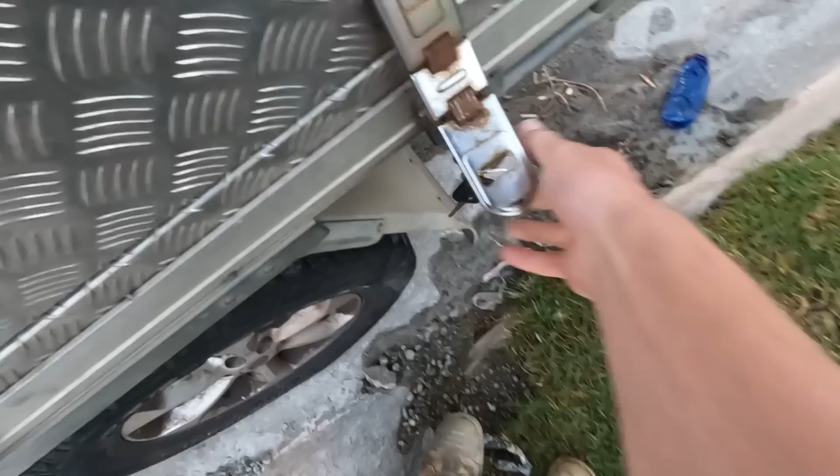Alright, so the slab's been flicked out. I wasn't here to film any of that process, but from here on out I will be filming everything we do on site. Now, since it is flicked out, we can jump straight onto the cut-in.

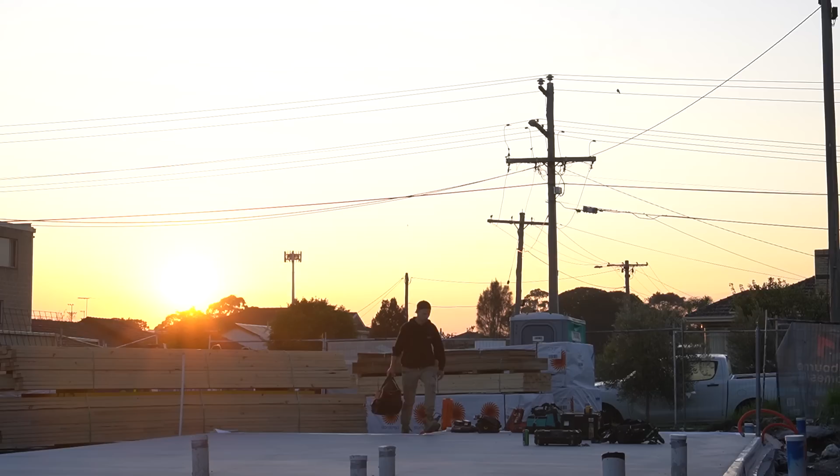I'm just going to go through and cut in the top and bottom plates and lay them out on all these flicked out walls where they have to go.

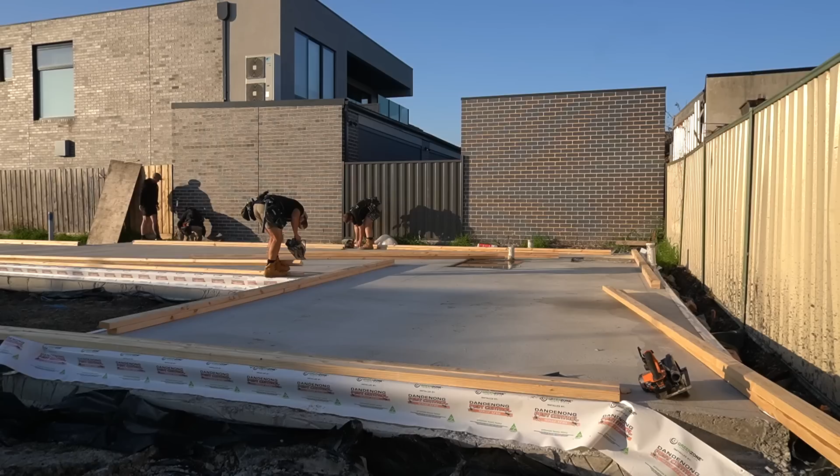So we have a couple guys doing this, and while this is being done, we've got a couple of the boys doing the pre-cut, cutting all the studs to size. We've actually got two different stud measurements for downstairs - the majority of the house is going to be 3 meters with 3 meter ceilings, and this back section where I'm working right now is actually going to step down and have a 2.7 meter ceiling.

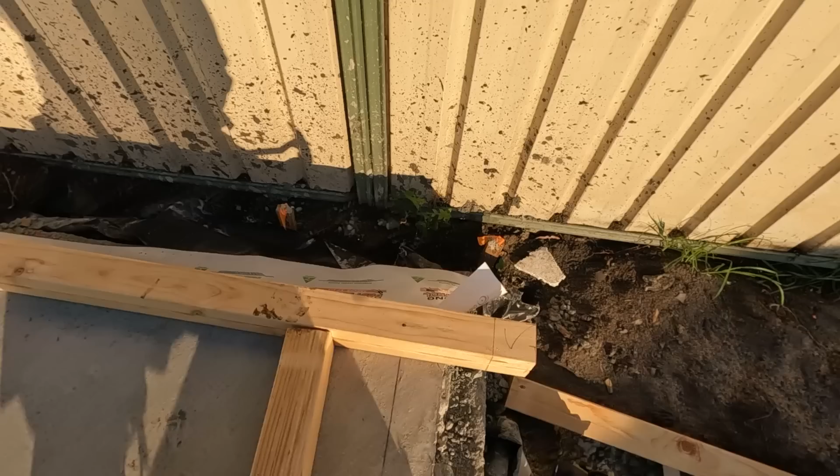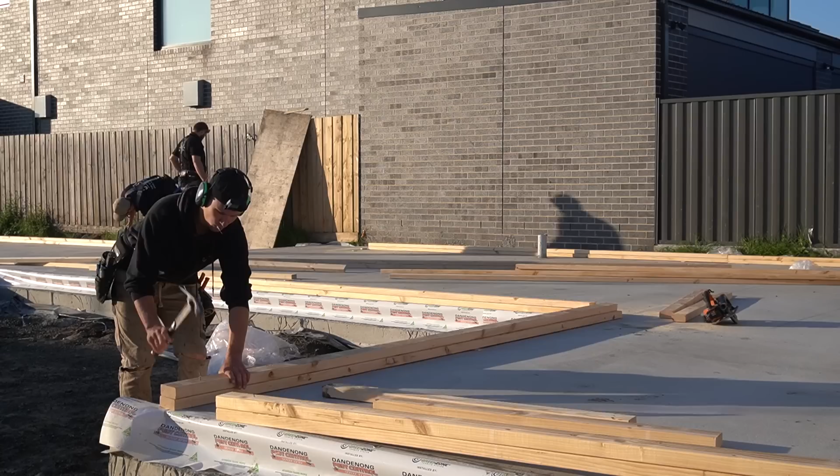So what we're going to do is go through and cut in all of our plates, and once all of our plates are cut in, then we'll go through and start marking out for the studs - windows, doors, niches, whatever we need. The only thing I'm marking right now is our junction marks to make sure that all of our plates are laid down in the right place.

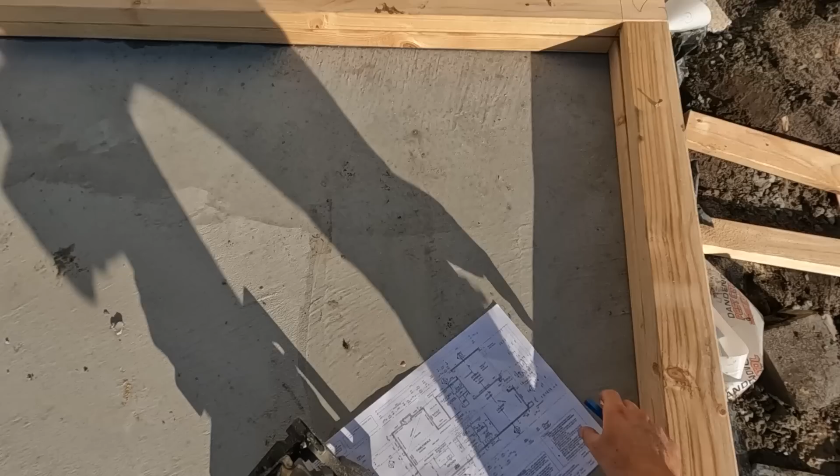Main thing we're looking at this plan, it's actually done quite well. The first thing we want to do is go around - we have measurements for the windows, the 2.4. That's the exact window measure though, so we're going to make it 2.420. We'll go through and mark those first, which is good.

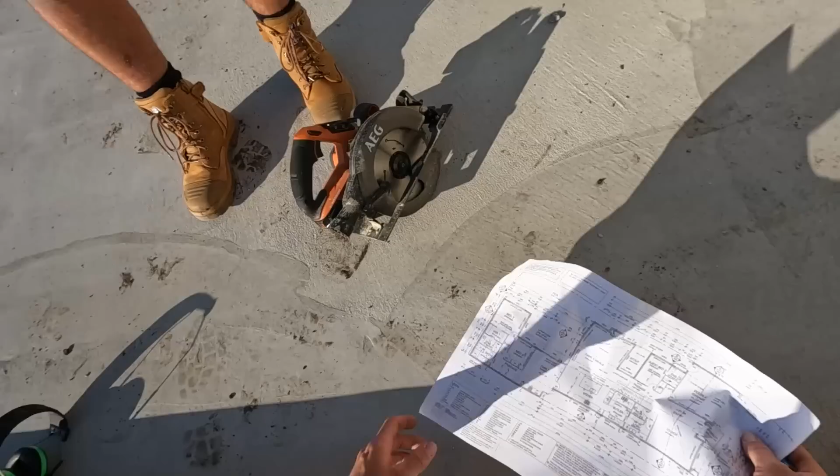The one thing we've got to look out for is that 1050 measure there - that's from brickwork, so we've got those 240 gaps. So we'll do this straight away. When we mark our walls, we'll rotate them so we're marking the external face. That way, when we frame it, our lintel is going to be sitting on the outside, and when we stand it up, it's going to go up that way.

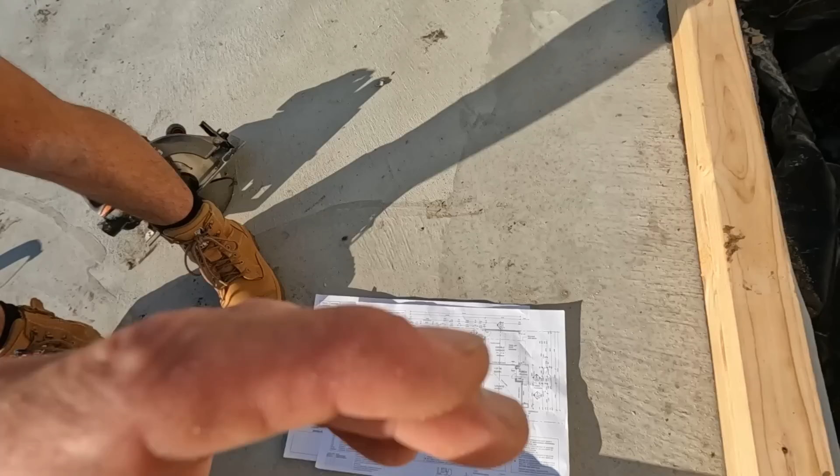So throw me your tape, I'll read out the measurements. I'll be telling you what to mark, just let me know if there's anything you're confused about - I want to know. So I'm going to hold you on 150 to this wall, which will get us brick measure. And then can you mark 1050, please? Hang on, let me square that up. Mark 1050 - that's going to be the true window measurement.

Is that what it was? 2400? 24, not 20 - just go 24 for now.

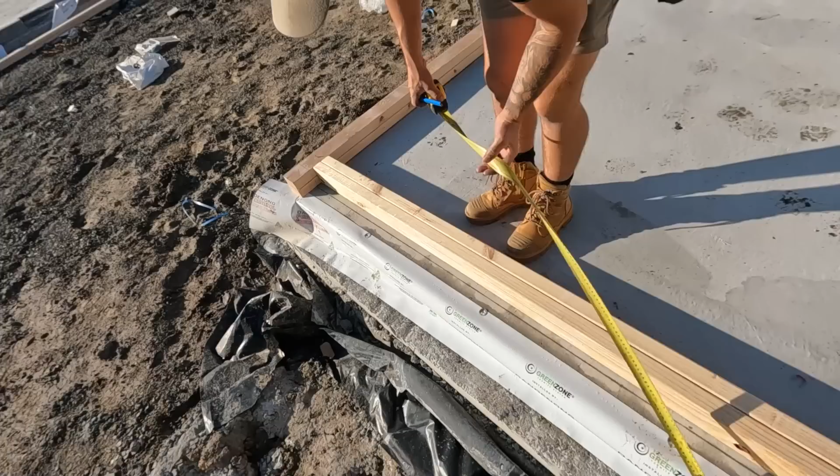Yep, so this is our window measurement. And then what we'll do is go 10 mil. 10 should be good, so we'll go 10 mil either way and square those. Don't mark anything on that though.

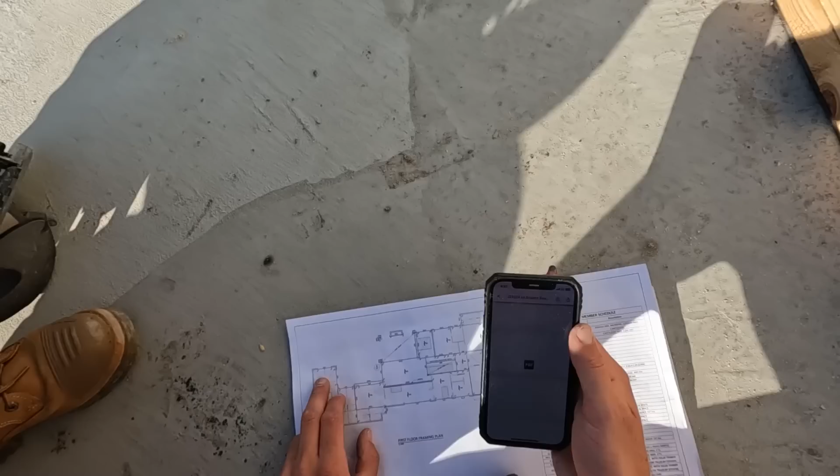Because now that we got that there, we'll check our lintel schedule and see what load studs and what lintels we need. So we can see DS1's marked on both sides. Normally DS1, the 1 normally means pine, so that means double stud pine. If it's DS2, the 2 normally refers to F17. Do you see a DS? Yeah, so see there how we got DS2? That's going to refer to F17.

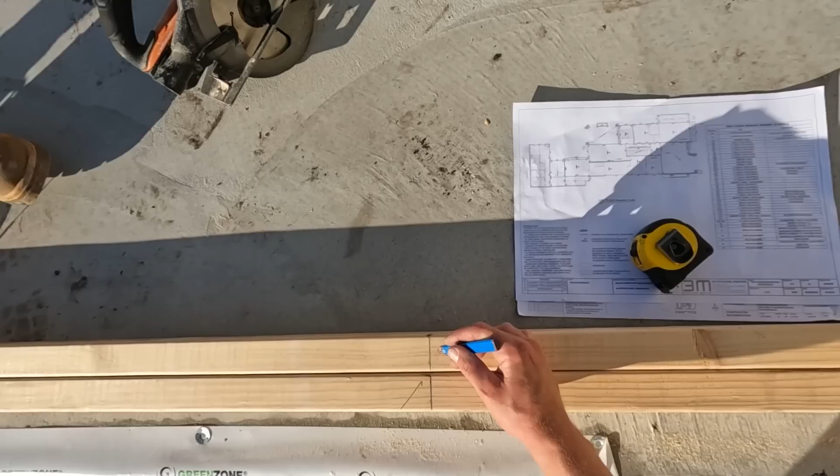For any stud that you're going to check out and have the beam sit on, I'll do a W for that and just an X for the closer. And then, if for example I had WWX, that's 2 checkouts, but what the plan shows is it wants it all to be 1 checkout and 2 closing studs.

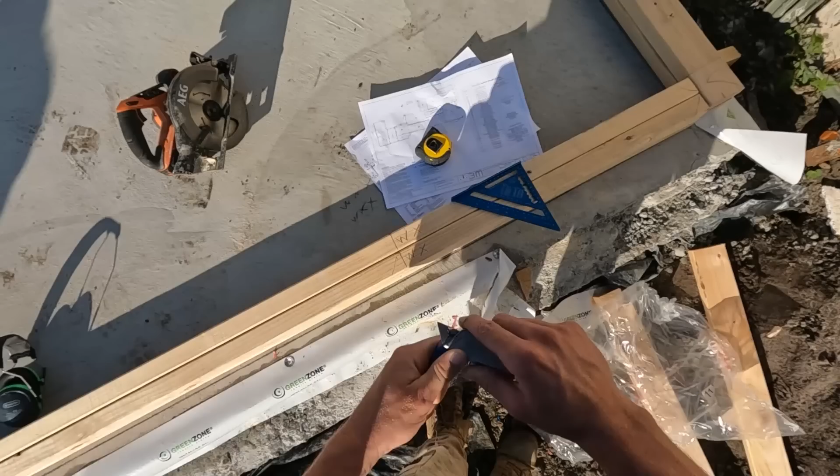While we're here as well, there's a few things we want to work out. If I was more organised, one thing I like doing the night before is on this plan, going around and marking the lintel sizes on that plan, then you don't have to take this one around. I just didn't have time to do that last night. I need to get a new pencil.

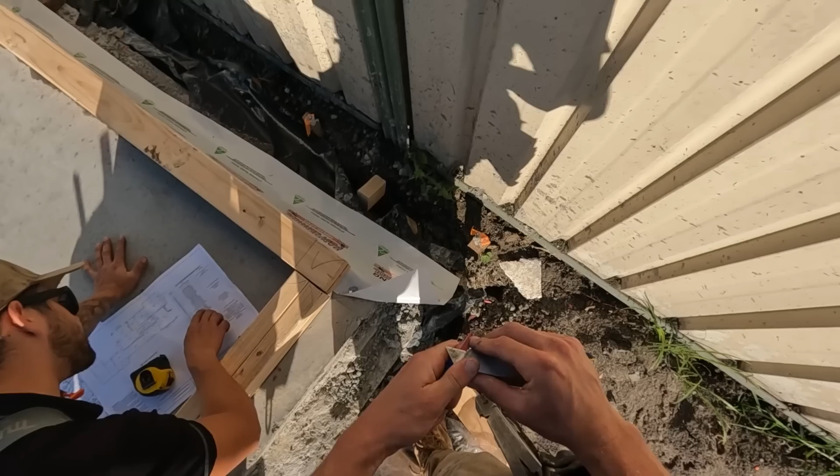190 times 45, pine? Yeah. Do you just want to write 190 pine on the top of that top plate then, please?

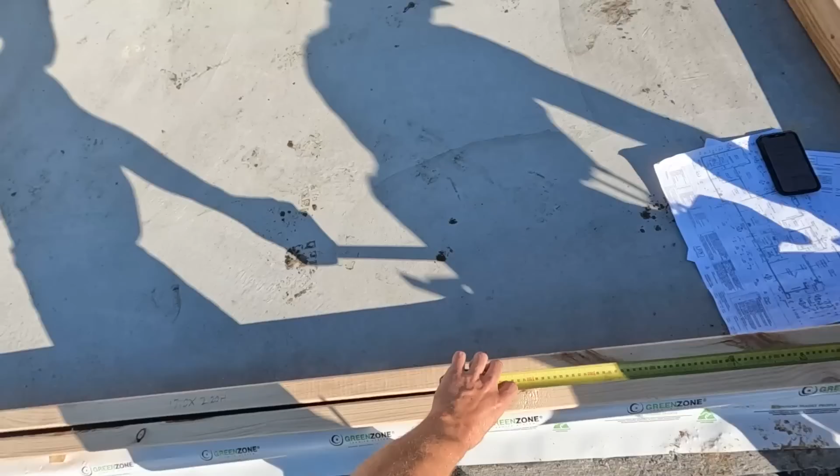To find centre of this wall frame, what we're gonna have to do is we're measuring off bricks. The brick's gonna start there. Can you hold me there? I'll talk you through what we're doing. So we'll start hooking over brick there. That's 150 past, and that means we're gonna stop.

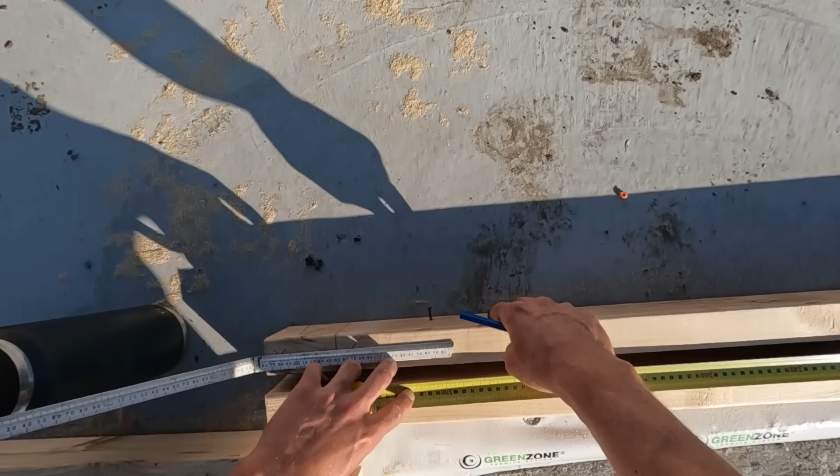I'm gonna do the same thing here. From the junction, I'm gonna come in 150. And that's where the brick's gonna start on this side. So between brick, we've got basically 3690.

How do you get the 150? Do you just get the 240 and see what's overhanging pretty much? So 240 is always your frame plus brick. Yeah, so if you minus 90 out of 240, it's 150. So the 240 is always from the inside of the junction to the outside of the brick. So that's where that 150 is.

So that's middle of the window there, that's centre, and this is a centred window.

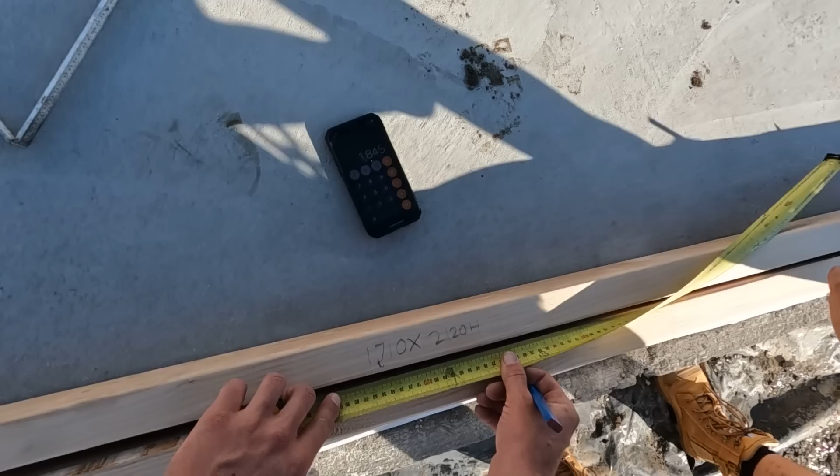So we had 1710. So that'll be, we'll come... no, come here, that's right. Half of 1710 is 855. I think 855, 16, yep. So if you mark 0, I'll mark 1710.

And before we mark those out for the lintels, I want to check that it works for bricks. Yeah, this is it - I wrote all these notes down when I was an apprentice. It's everything I didn't know about framing. So you can say we got bricks here.

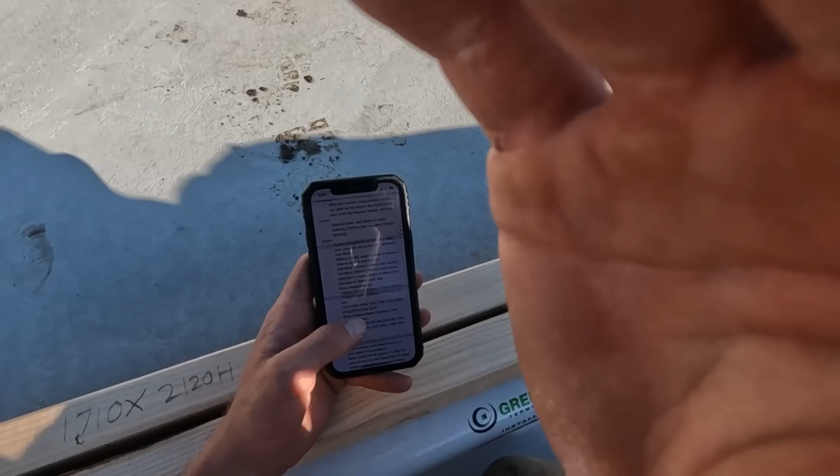We need a 240 cavity. It calls for - is that 250 there? No, 240. Oh it is 240, yeah cool. So you've got a 240 cavity on the external side of bricks. So we've got half a brick which is 110, 120 with mortar, full brick which is 230, 240 with mortar.

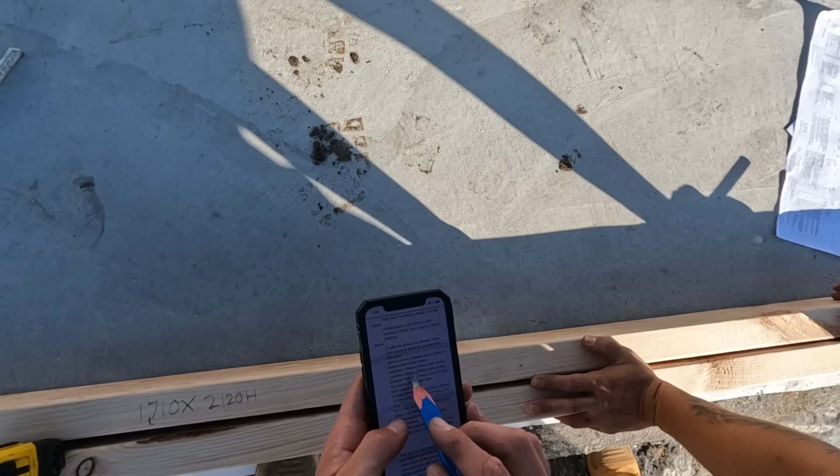I've gone through and worked out our brick measurements. If you hook me over that 150 again. So I've done two measurements - I've done one measurement holding at 150 there, and I've got another line of measurements if I actually hooked it over the frame. We'll keep it where it is right now.

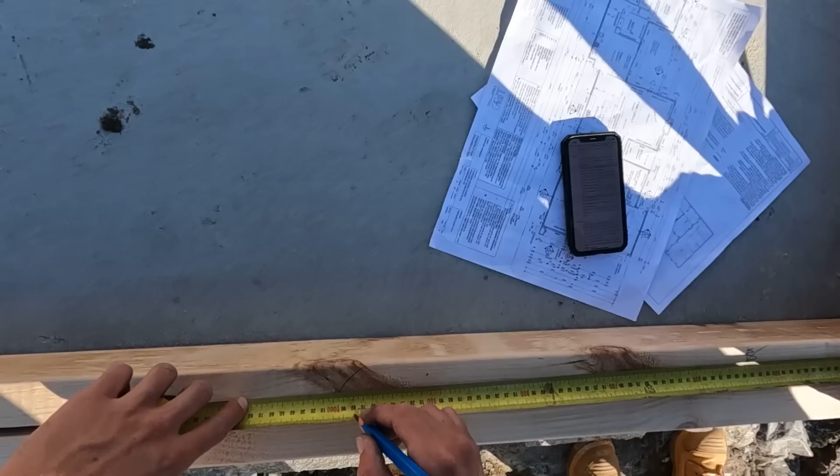So these are going half brick and full brick. So we've got 110, 230, 350, 470, 590, 710 - this is our mark here. So what are these bricks ones for, half or full? That goes half, full, half, full, half, full.

So we're at a metre here. A brick is either going to be 950 or 1.07 metres. So that's where our window is there. What I think we do is we move that over there, and then we get 4.5 bricks to work into it. And then I'm just going to check this other side to make sure it works with bricks too. But yeah, that's what you do with it.

Normally these window plans, they have the measurements already which work with bricks. Yeah, so you can see that's got 700 there, for example.

We've got a brick and a half, makes it 710. Since we're changing the windows, we've got to rework out where the bricks go. Otherwise you're going to have real crappy offcuts of bricks next to your window. It doesn't look good.

So we move that window to there. It's going to finish perfectly with a half. Actually, I'm wrong, that measurement's to our window frame. So that's our frame measurement for the window. We want our bricks to actually go hard into the window.

So on the plan, the width is 1710. Frame width is 1710. Window is actually 1690, so we want the brick to finish 10 mil across. So if the brick's finishing there, our window frame's going to finish there, and then our actual window, once we frame it, will be finishing in line with the brick. Does that make sense? Yeah, it does get pretty confusing.

I can send you all the brick measurements once we're done here too, if you want to look over it. Yeah, beautiful, that's marked. You finished marking that side? Cool, we'll keep working our way around.

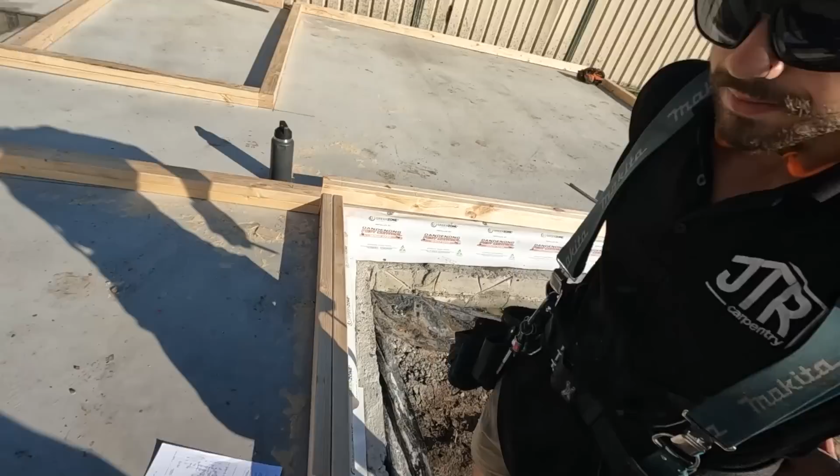We're coming across 500 now from brick. If I hold 90 there, actually let's just make it easy for ourselves. That's the end of brick there, 150, and then we come across 500. So that 500, that's accurate window measurements. We'll come back that 10 mil. Do a dot there.

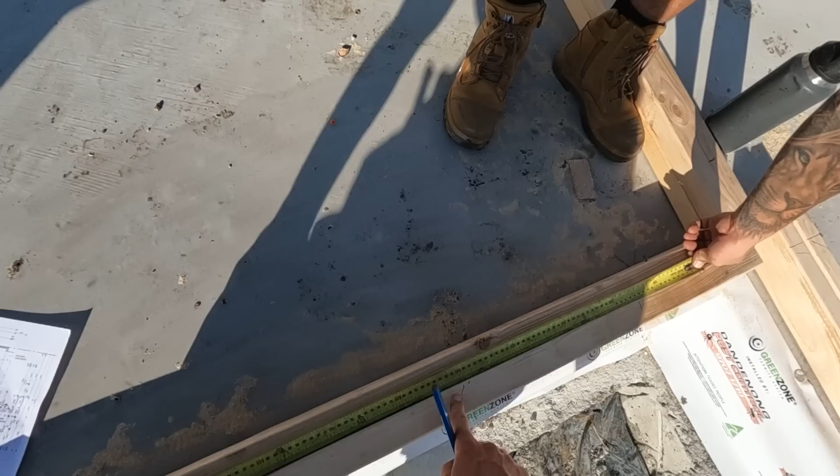And I'll do a tick there too, because we're going to be - can you hold me on that one now? The one with the tick? Yep. Width is 1690. Good there? Yep, so that's that one, and I'll add another 10 mil for the frame. We've got a gap of 1850.

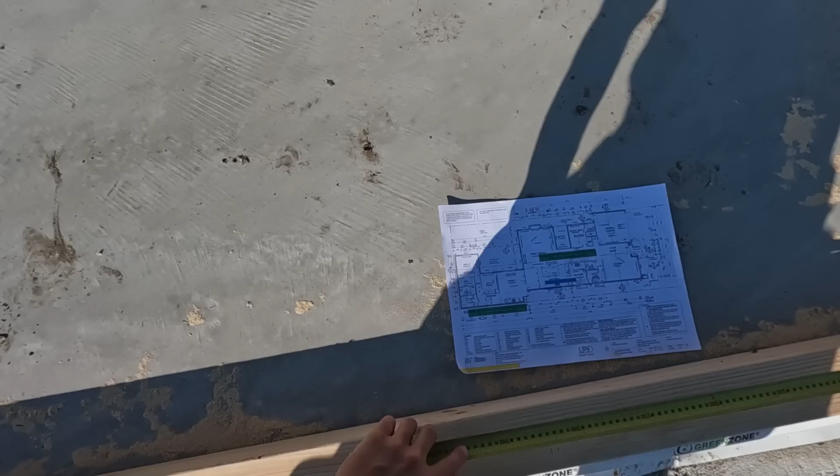Can you hold me on that one with a tick again, please? Yep, thank you. So 1850 there for the window, and I'll go back 10 mil for where our lintels will be. 3010. You good there? Yep, 3010, and that will be where our studs go.

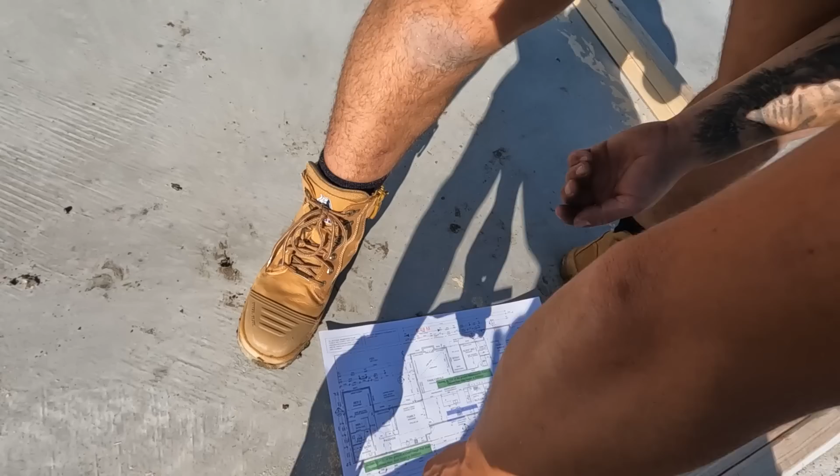And we should have 710, that is to brick. So that's 710 gets us - oh, I'm sorry, bro - gets us there, for load studs, for that window where you're right there.

It's TS1, so do 1W and then a double X. And you're not marking them on with a tick this time, yeah? No. Yeah, cool.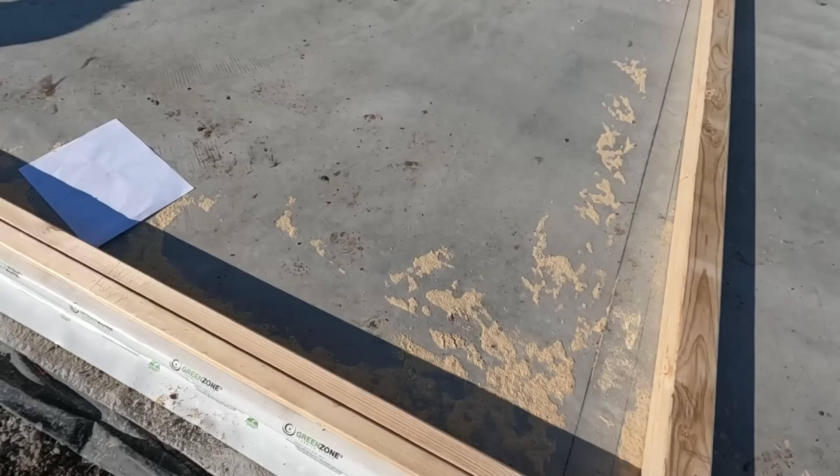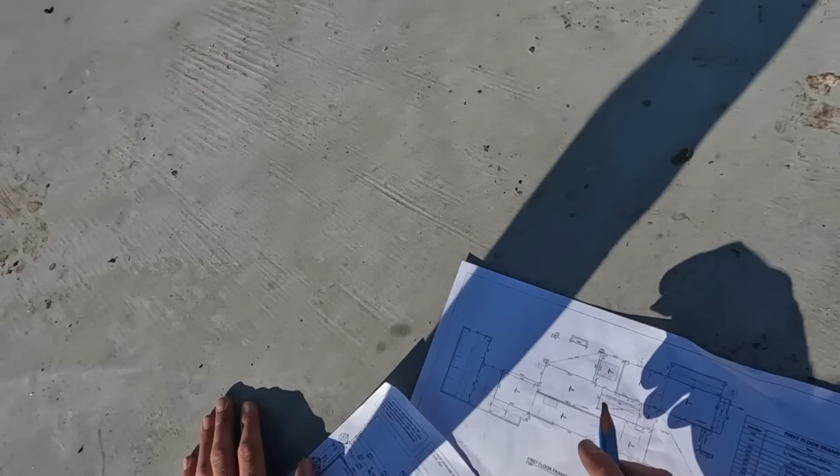And then what was the - are you looking for lintel? Yeah. You've got a one, I've got it here, so 1L8. You got a double 360, but it does say within floor space. What was your window height for that one? I think it should be 2.4 high. I don't understand why that's got to be in the floor space though.

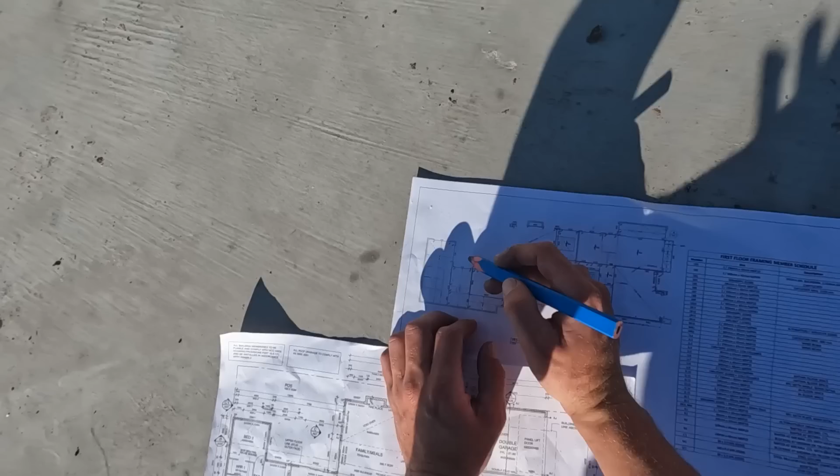Just write down for me, write 2 times 360 LVL, and I've got a 1L5, I've got a 190 pine. And can you write floor space next to it? When we get to framing that, we'll have a look into it - the window height might be so high that we've got to check the top plate and have it sitting up into the floor.

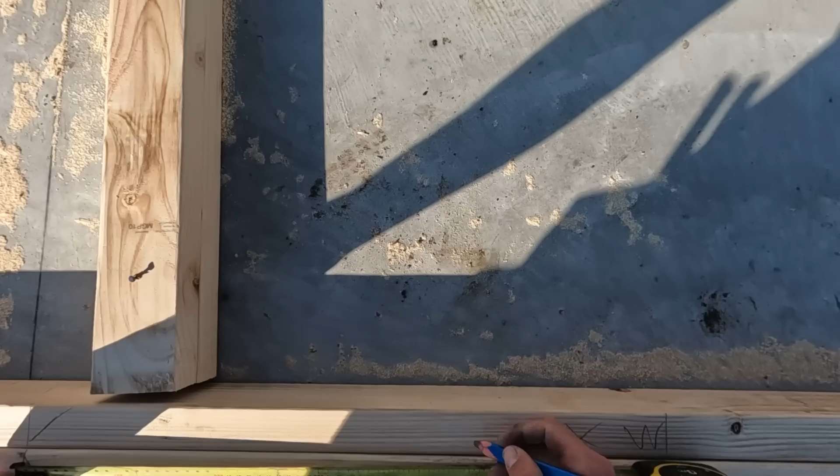This one was... well this other one... yeah, it's 20, sorry, 10 either side, so 20 in total. There you go, yeah, 50 there.

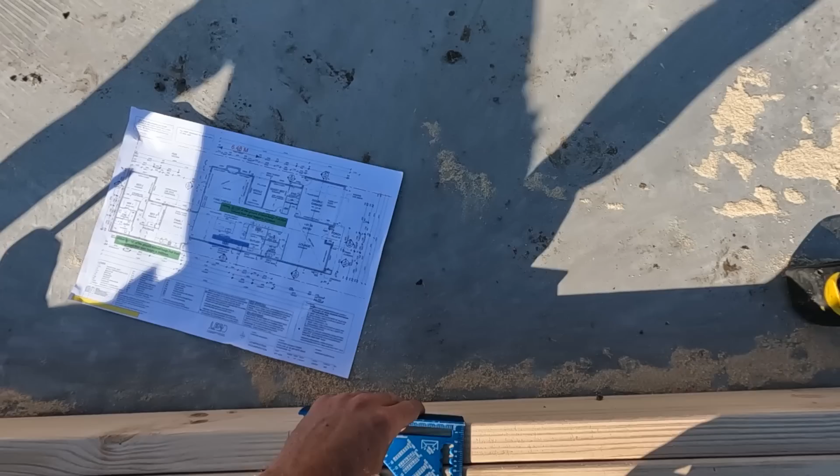Alright, so we've got all of our walls cut in, marked out, ready to frame. So we're going to start opening some up and chucking some studs in and framing them together.

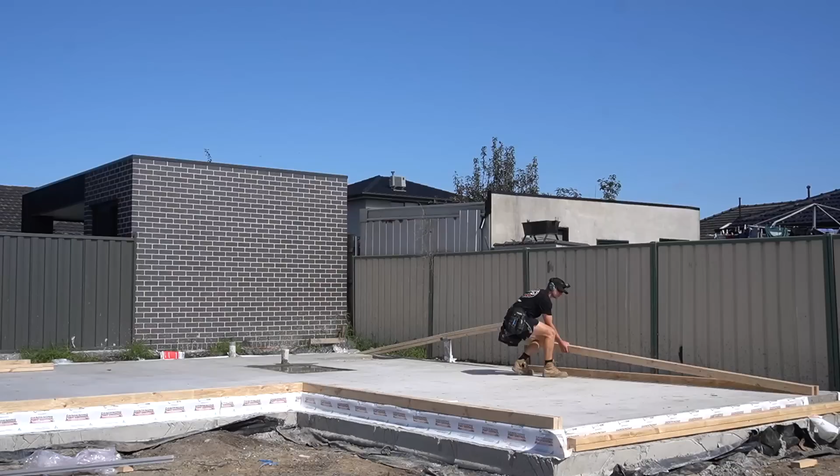One important thing I'm doing right now is making sure when I open up my wall plates that I keep them square with each other. When we frame the walls on the ground, we want to make sure that they're as close as possible to being square. If they're just a little bit out, that's fine, we'll fix them up when we plumb our walls. But if we build them a fair bit out of square, it's going to be a nightmare when it comes to the plumbing process.

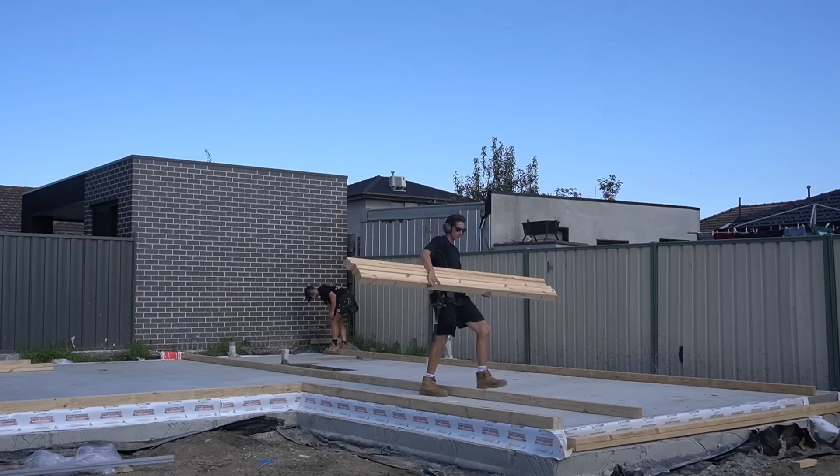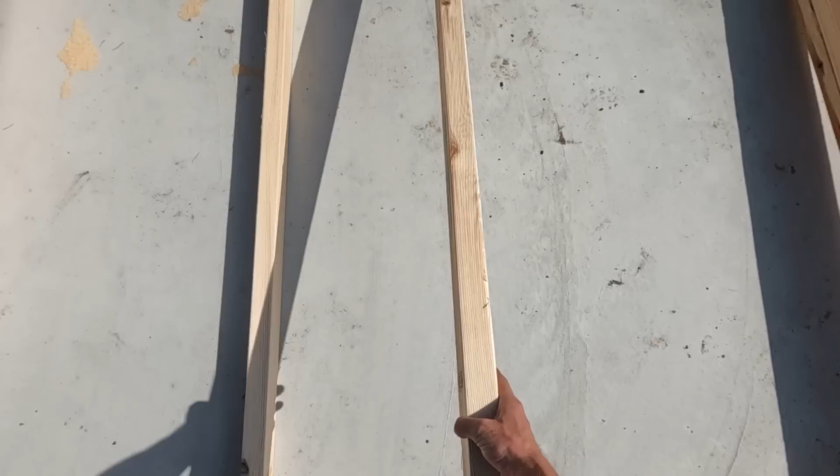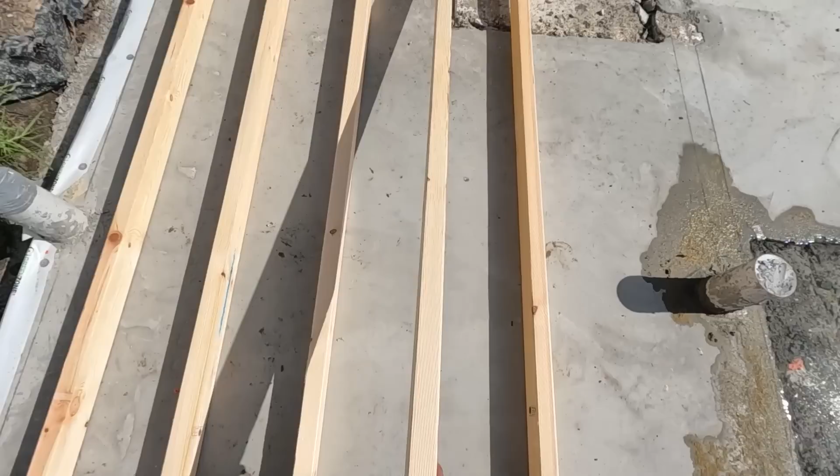When I'm going through and chucking these studs in, I am sighting every single one, making sure that the bows are face down. There's two reasons we sight our studs and do bows down. The first is that this will be an external wall, and by the time we stand it, the bows are going to be on the inside.

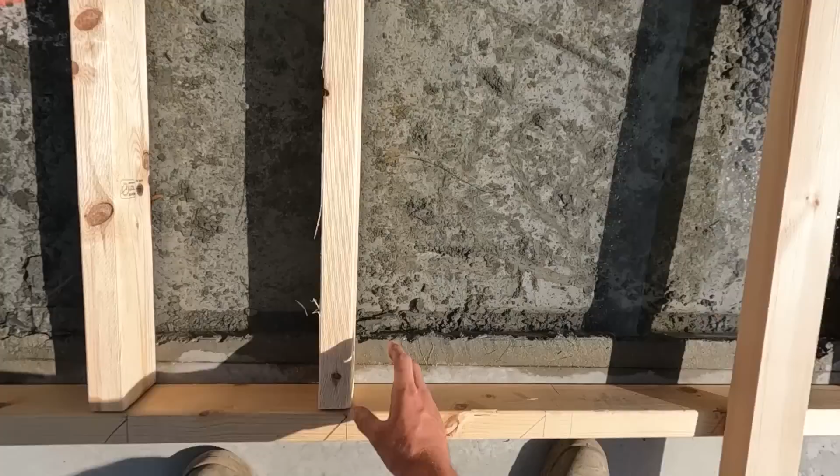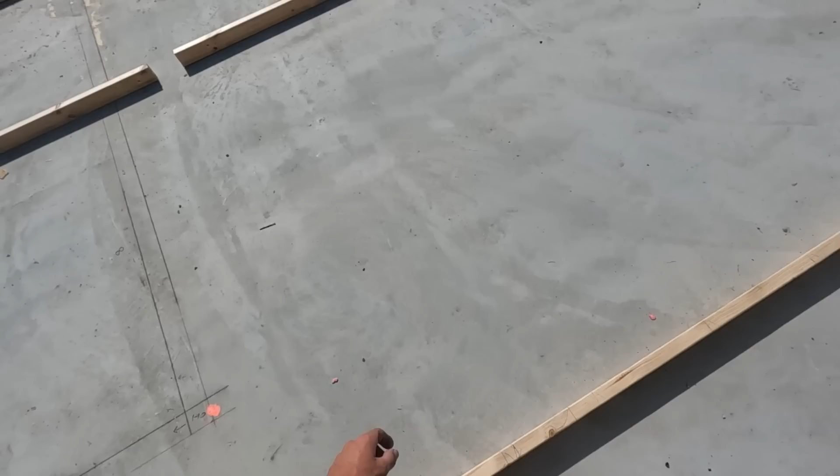So when we come to straighten our walls, it's a lot easier to get the planer and hit the stud rather than packing it out with a masonite packer. It's so much easier when every stud bows towards you, you can just plane every stud. If you're on the other side, you have to go through and pack all the bowed ones. Most of the studs we're using today have been pretty straight, so hopefully the weather doesn't affect them too much before we straighten and lock up this place.

Compressor is cooked.

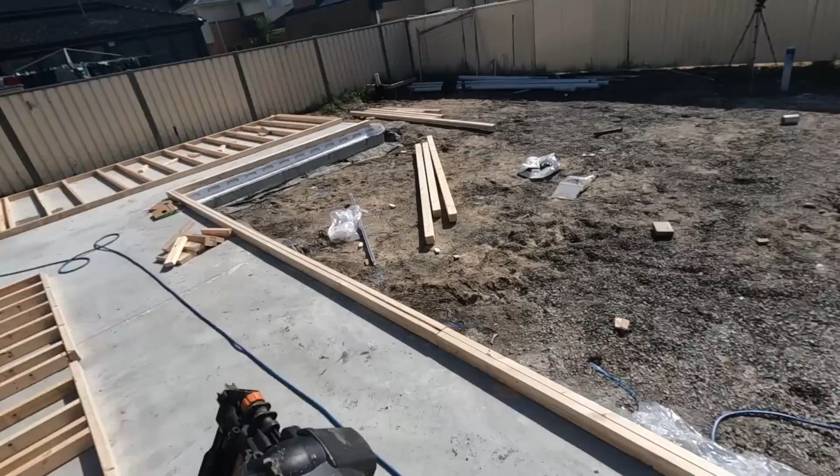I'm gonna do this old school, or new school, I should say.

What's wall height? 2.7. 1350.

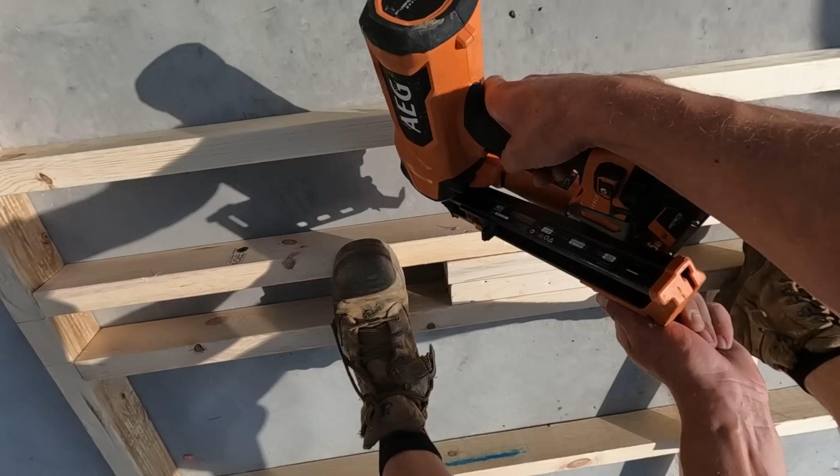Have you marked crossies or anything? I have not, I haven't even looked at that plan yet, I don't know what we have. I was thinking if it's on an external, did you want to do it now before we stand them up? These two walls here will have a truss roof on top. For a trussed roof, we need straps every 1350. So you're gonna come in one stud, miss two, do one, miss two, do one. Yeah, or at least for the 450s. For the 300s, you can almost miss three, do one.

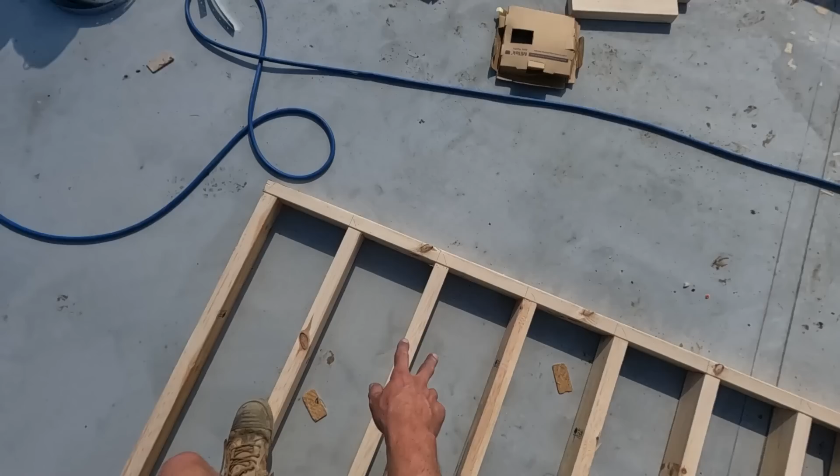Well, the AEG seems pretty good, huh? I love it, man. Is that you actually rate it? Yeah, listen to the thing go, bro. It's so good, and you can actually skew with it too, which is even better.

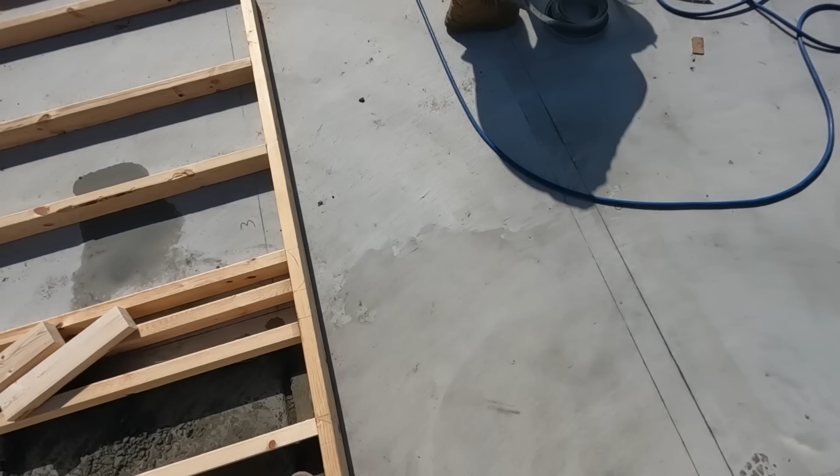I tell you what though, using a battery gun for doing this gets hard because you're trying to twist it and hold it on its edge. Yeah, it burns the forearm. Yeah, I bet.

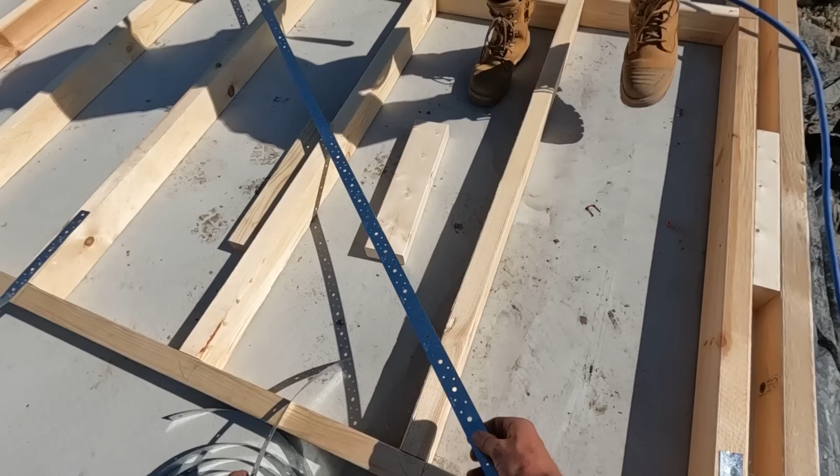You shoot one nail there, please. One. Yep, thanks. When I get these right as well, I'll loosen it off. But those bottoms can get completely shot off. Four nails in the bottom and bend it over.

Thanks. Nice belt, bro. Why is it on your feet already? You right? Oh, shit.

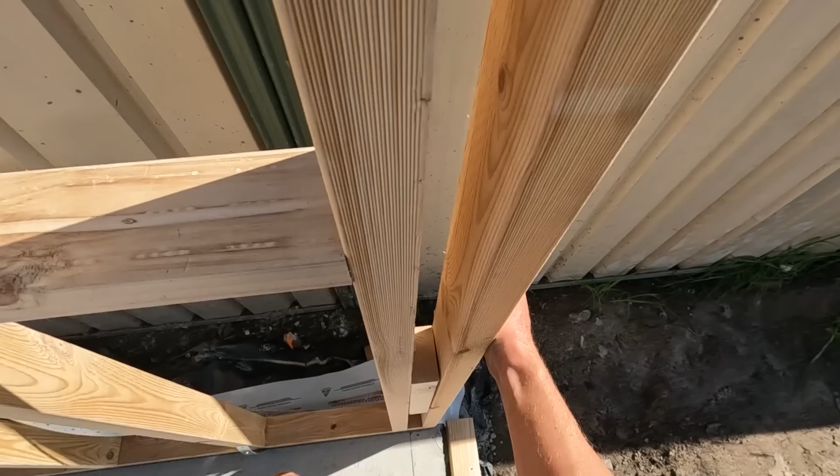I'm on my junction, okay. Are you good? Well, no, I was just saying, do you want me to come to you? Okay, how are you though with your junction? Oh, that's awesome. Firing, firing. Oh, he's playing with us. Bit premature. Yep.

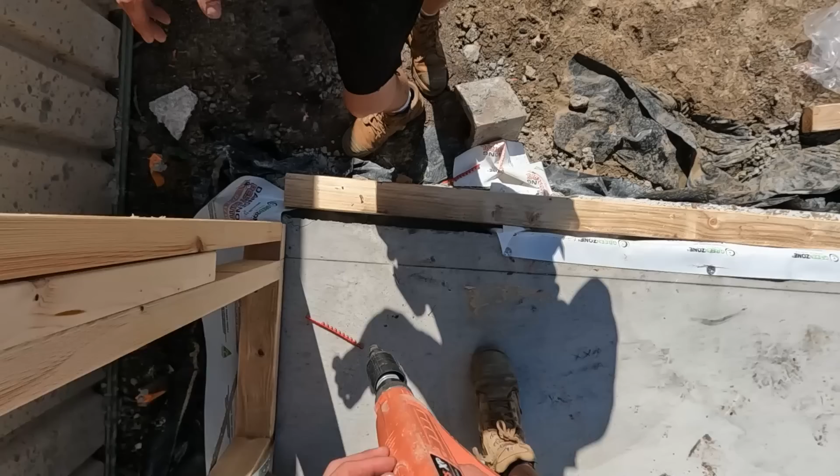Okay, watch out. There you go. Oh, let's turn that up. That looks like it was right. Did it? Yep, I'm going to turn that on max. Can I get one more nail, please? Still good there.

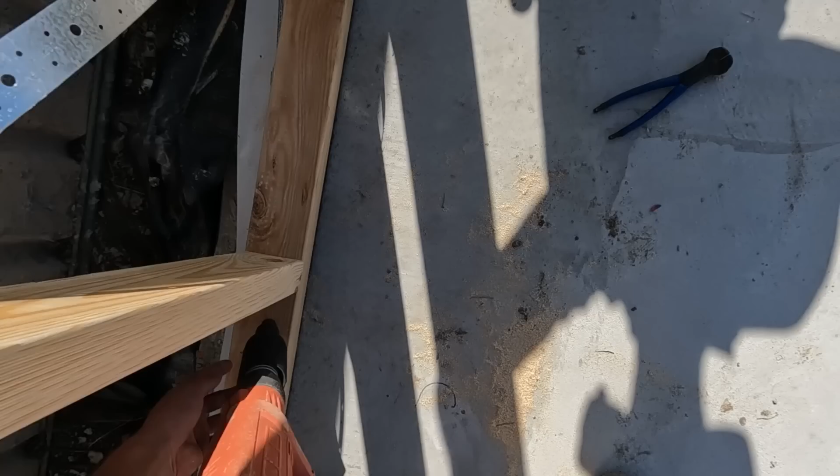Dude, why are they not punching? Yeah, that's on max. Can I get one more, please?

I wonder how old the slab is. It didn't look that old on the video.

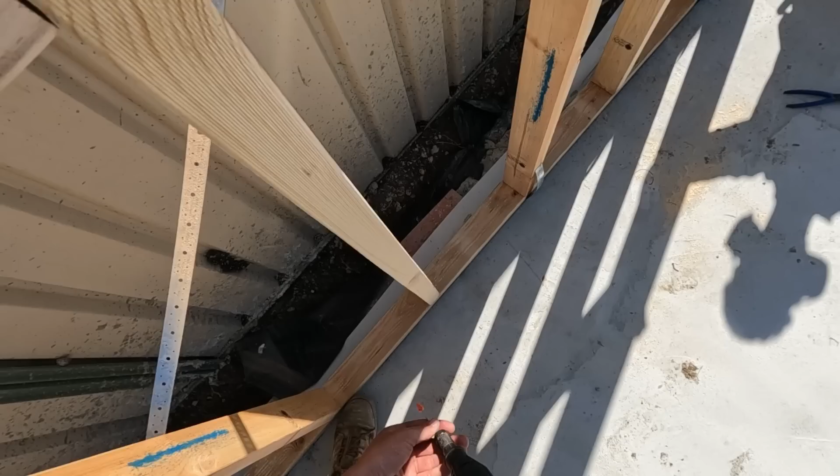Yep. Let's slide the bottom plates like this. I'm gonna go to rock.

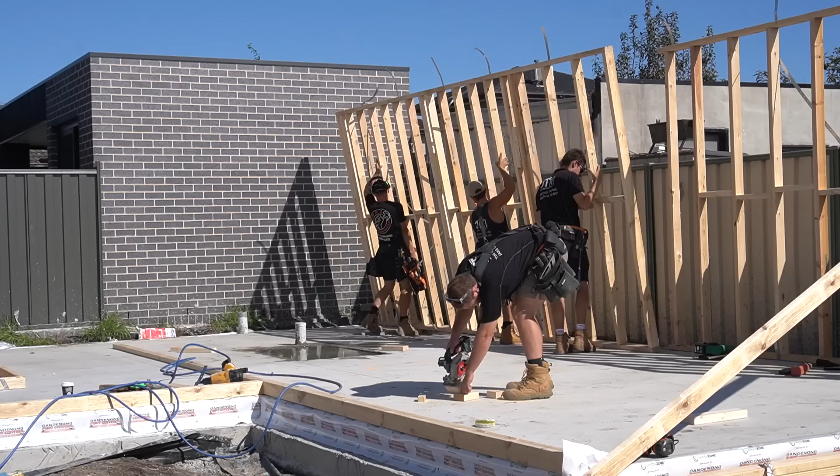Put some stuff on that. Put a bit of.

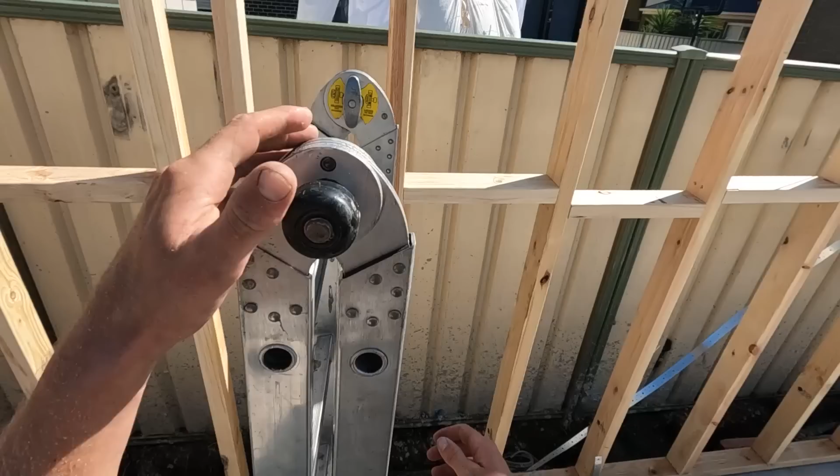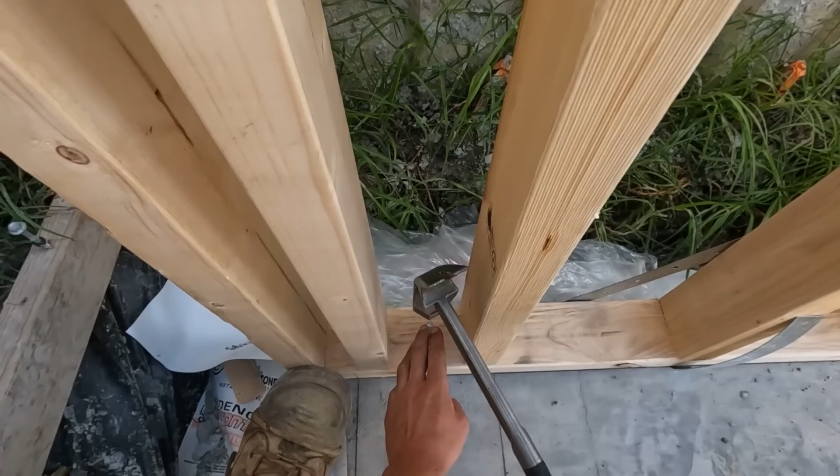Three nails. One hole. There you go. Oh. That's not getting safe.

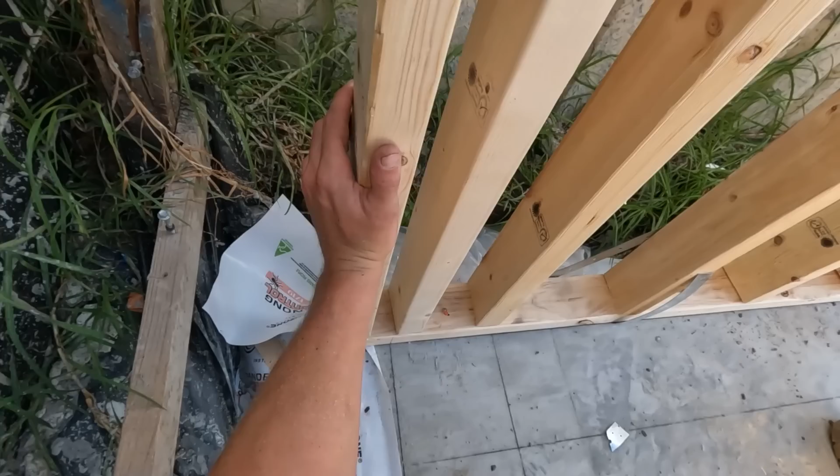Oh, I was about to say I spoke too soon. I was just about to say, what'd you say? And then, oh, screwed it. We're both about to be too cocky, too quick.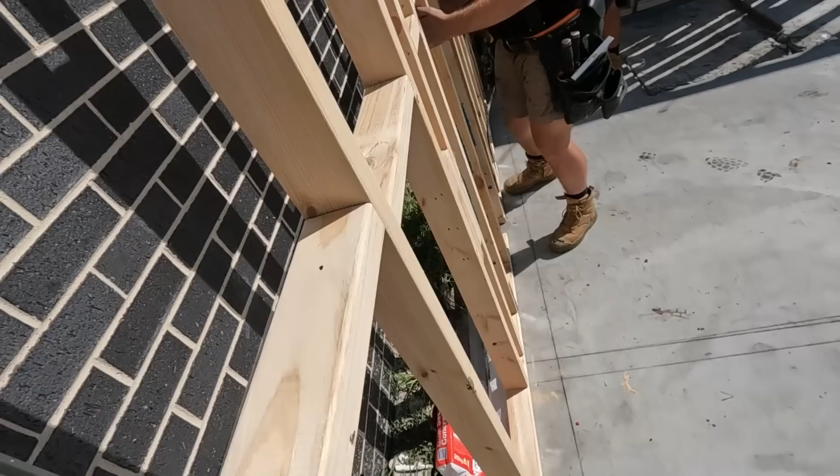Nice, can you hold this side? Oh, whoa, can you hold that please? It's looking good, it's looking like a home. Is it bottom shot, Mitch? Yeah, do you want to start hand nailing that off then, please?

I kind of want to top plate it straight away to get it all tied in, but... you do? Yeah, kind of. Is it pretty straight? No, we'll leave it for a second.

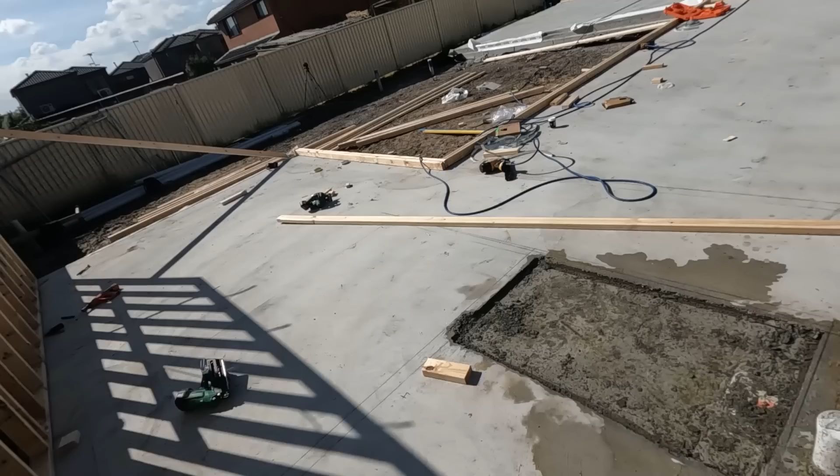I think let's do that external in place, open it up there. That external in place, open it up here, and that external will slide it across here, and we'll open it up here. Yeah, okay.

For the time being, let's just move the hoses, the guns, everything off the slab, we'll get it clear. Are you alright standing there until we shut it off? Just keep looking good and doing your thing, boss.

Oscar, do you mind also opening this one up here too? Yeah, sure, just because the lintel is going to run the entire way through. Yeah, I think we just do this in one shot and stand it all the way up.

Do you have a lintel in here? Oh yeah, you do. I was saying to Jack, you guys just keep shooting when you can, and I'll try cut the lintels in. Oscar will try do nogs and everything. We'll try stay ahead of you guys. Thank you. Obviously, if it gets to a point and we're too slow and you're too quick, jump on then.

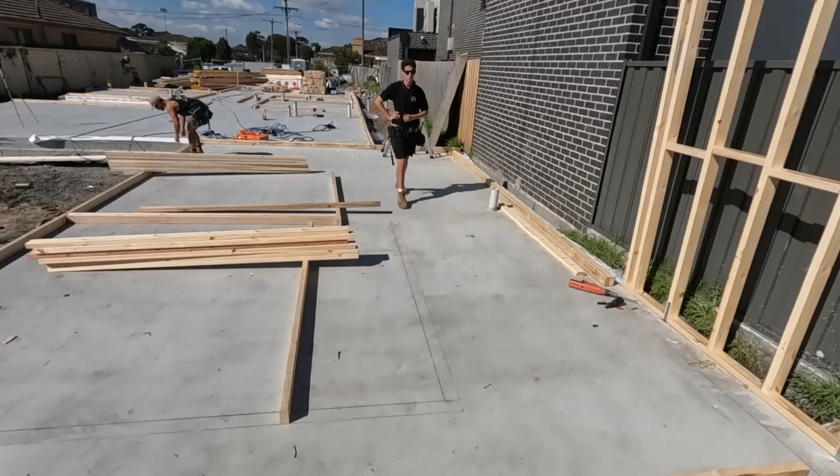In terms of getting studs, if you need a couple more studs, grab those. But then, yeah, I'll do everything for you. Thanks, bro.

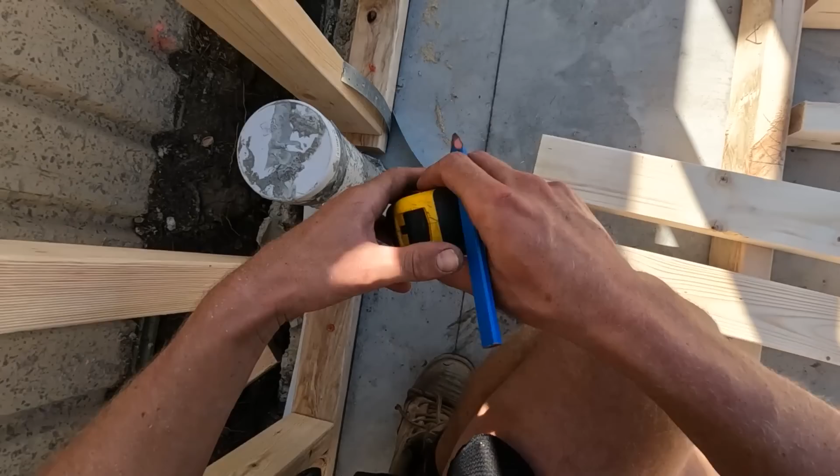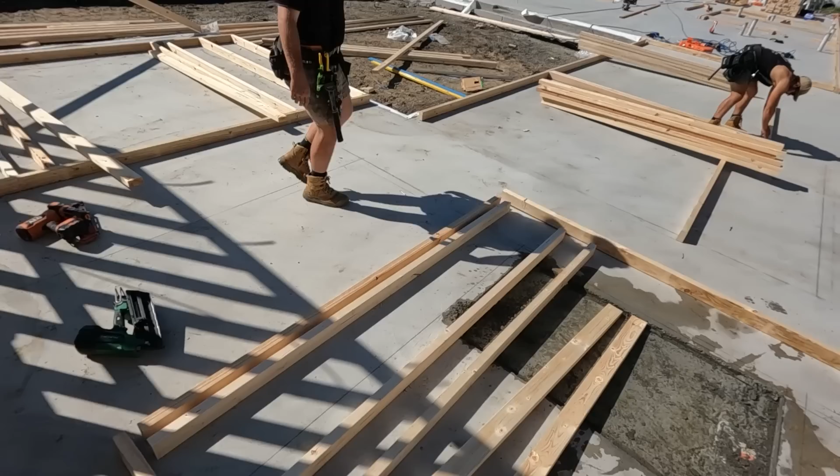You're getting the window stud. Are you always just going to lay both of them out and then shoot them both of them in at the same time, like the window? Yeah, otherwise it's a bit of a play around because you'll be measuring 45 across. Yeah, if you're waiting, you can jump on and start laying those out and shooting those in.

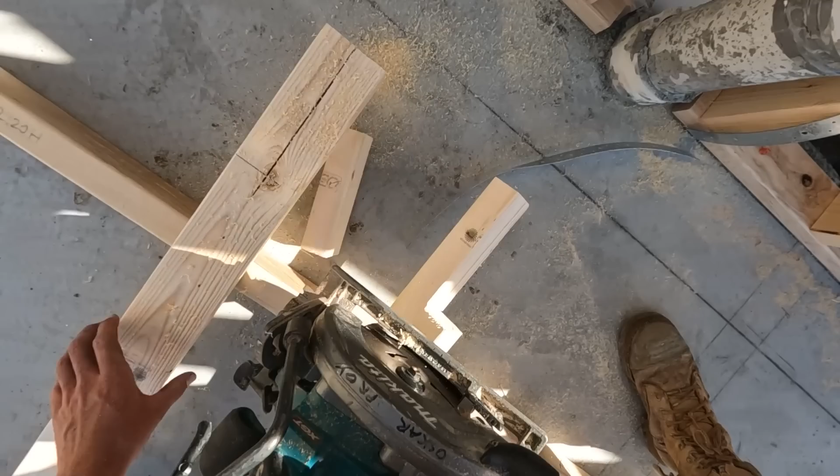Hey Mitch, I don't think you heard this before. In this line here, going through the slab here, this is where the upstairs section stops and it drops down to a lower ceiling. That's why this wall here, we've got the 2.7 matching in with the rest of the house, which goes to there.

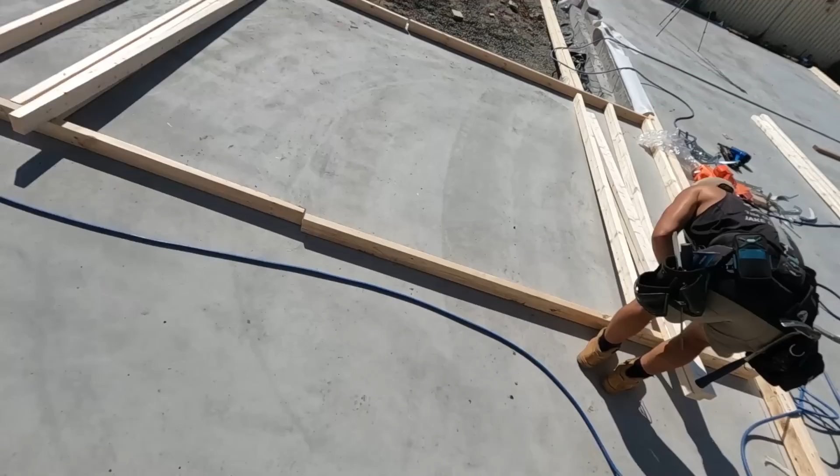And then on the load point, it jumps up to the 3 metre room here. So in terms of our 2.7 walls, it's gonna stop there. And this is also 2.7 through here, finishing where that doorway is there. So from this point onwards, everything through there's 3 metres. Just in case you got up to that and you're wondering what was going on.

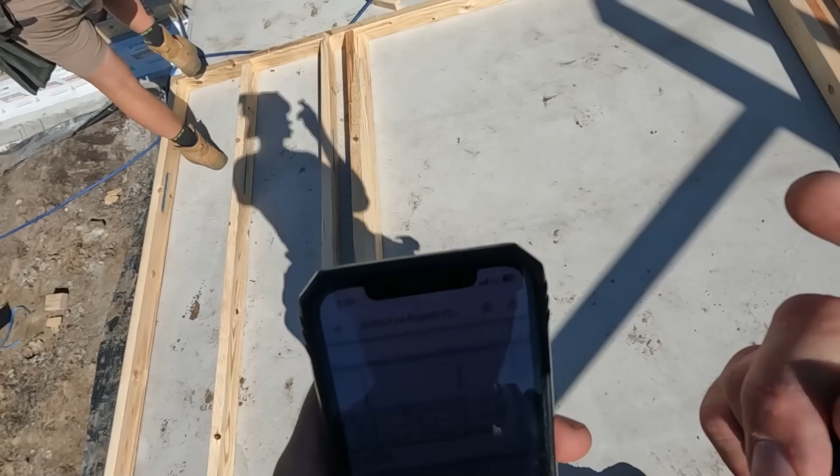Sweet, so these windows are at 2.4. I'll go 2.420. And 2.120 high. To 120.

Sweet, ready? Up. Just gonna kick this out of the way. Hang on, can you hold that for a second?

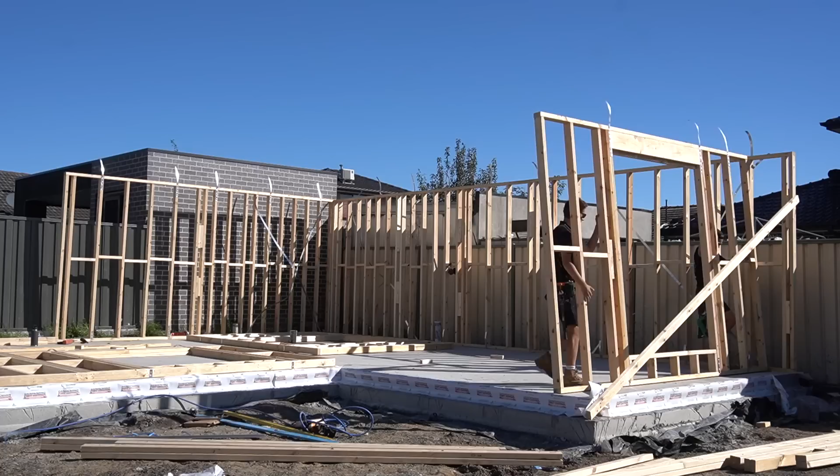I've got an issue with this termite protection. Oh yeah, let's fix that up. No. Yes, sir.

Can you hold that balance for me please? Make that work. You've got me running, I like it.

But gee, that's what I was saying before. I was kind of thinking of doing the pitching plates as we went, but then it screws us because we've got internal walls butting into it and we can't do those gang plates.

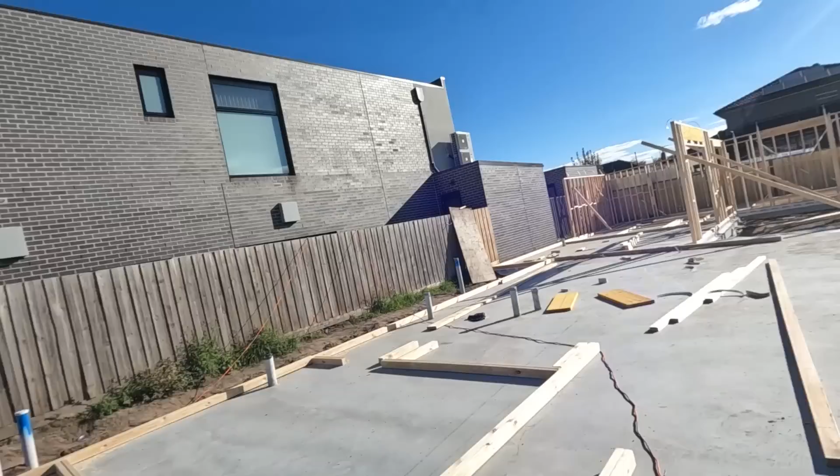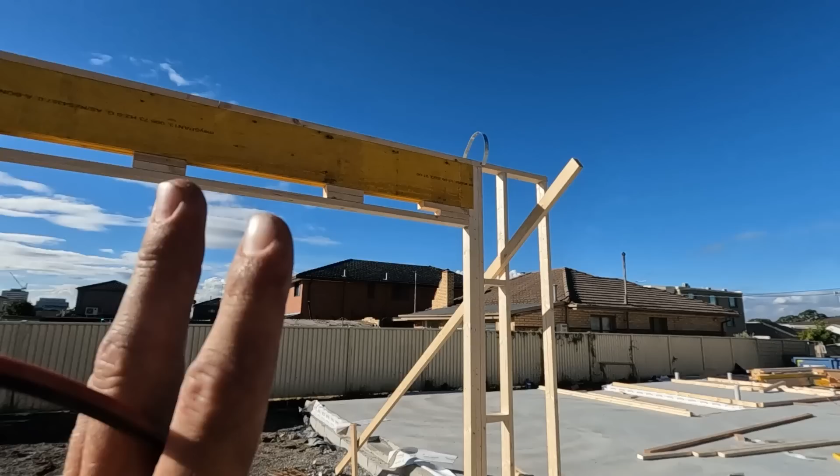Oh, it's been a bloody awesome day. Everything's cut in, marked out, and as you can see, we framed a lot of the lower section. This is all the 2.7 section. Obviously, you see it kicks up there, and from that point onwards, that entire house is going to be 3 metre walls. We've got a few walls laid out ready to go in tomorrow.

Doing a few, doing a niche mark out in here. There's a few things going on. It's been quite a while since I've done a stick build, so we're a bit slow building these first few walls. There's a few guys that haven't done much or any stick building at all. So we're kind of just getting the system going. Hopefully tomorrow we start flying through it.